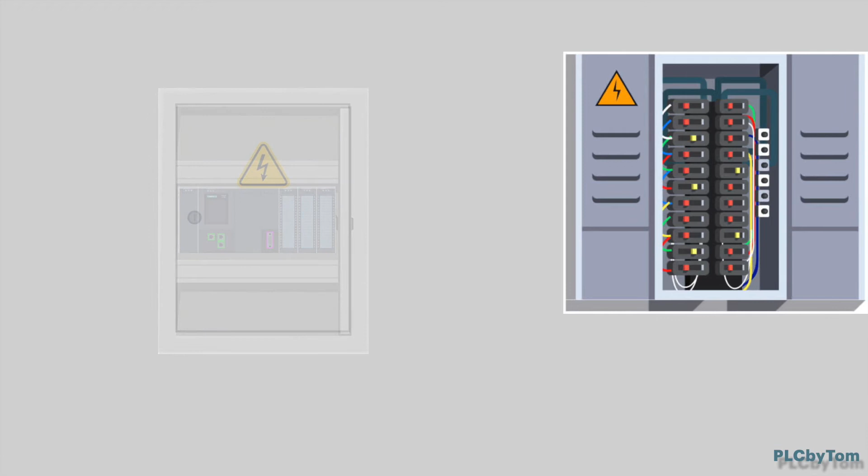It has a compact design and fits in the electrical cabinet. It provides flexibility in programming and high reliability, no program crashes or mechanical failure. Before PLCs were invented, machines were controlled by electromechanical relays with complex wiring. This approach is called hard-wired control. These systems were complex and extensive. They took up entire walls, which required massive wiring.

Relay logic is a hard-wired control system using instrumentation, switches, timers, relays, contactors, motors and actuators. Before PLCs were invented, machine and process automation was accomplished using relay logic. Automating a machine using relay logic requires massive wiring and a multitude of devices to perform even the simplest of tasks. Today, relay logic is done in the PLC, which provides flexibility in design, modification, maintaining and troubleshooting. Also, implementation of the control system is simplified.

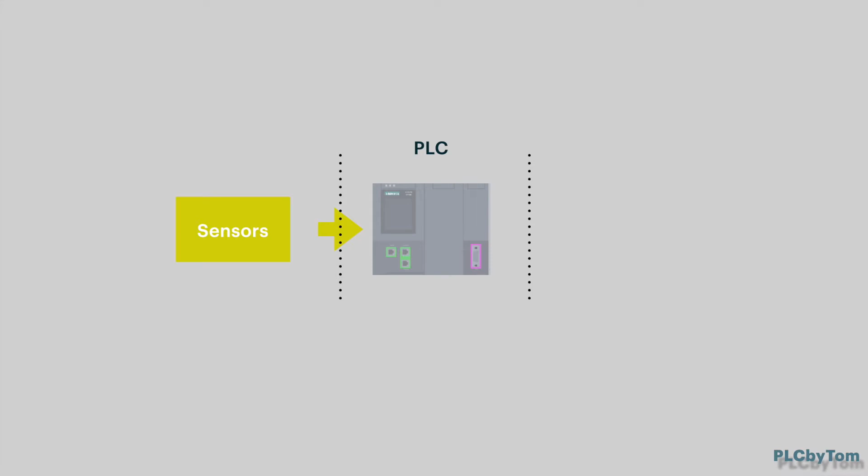Today most industrial automation relies on PLCs, like the oil industry, car industry, food and beverage industry, chemical industry, etc. PLC is able to read statuses and measured values from sensors via inputs, such as temperature, level measurement, or even push buttons or switches. And based on the user program which executes in the PLC, it is able to manipulate outputs in order to control machines or processes. Devices which are connected to the outputs such as valves, pumps, motors, heaters, etc., are called actuators.

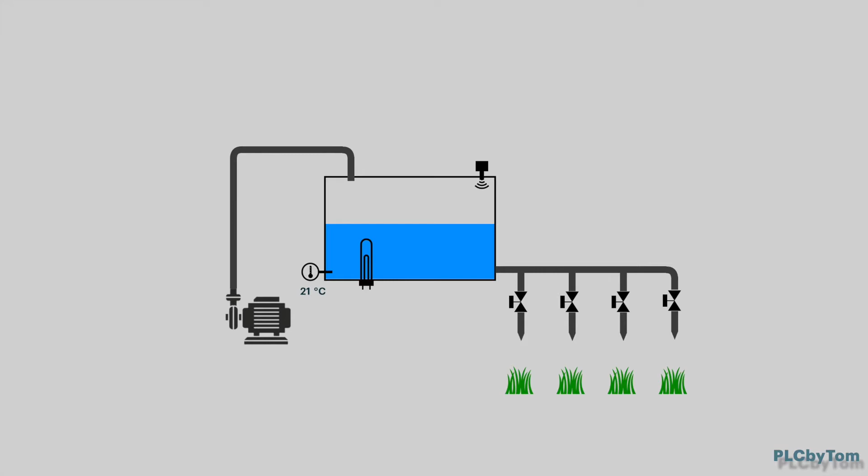As an example, let's analyze the following scenario. There is a water tank with temperature control. To maintain the temperature of the water, there are a temperature sensor and a heater. When the temperature of the water drops below 20 degrees Celsius, the heater will start until the water temperature reaches 22 degrees Celsius.

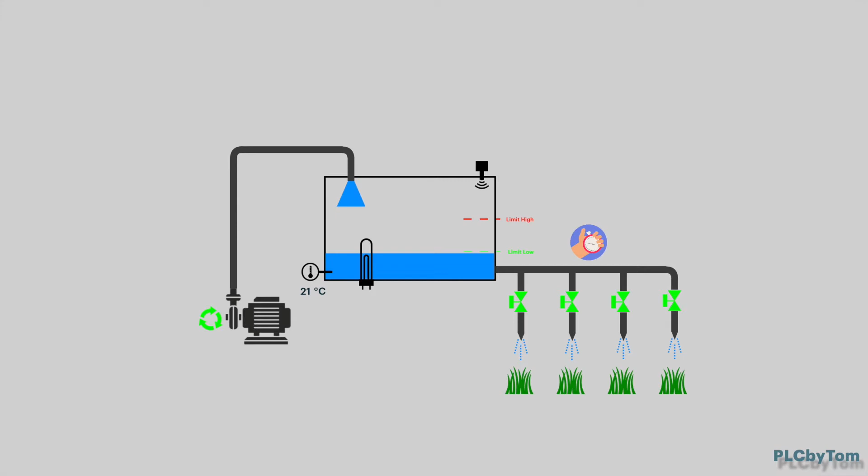The water tank can be refilled by a pump. To check the water level we have a level sensor. Below there are outlet valves to supply nozzles for watering of plants. The task is to start the outlet valves every day at 7 p.m. and let them run for 5 hours. This will discharge the water tank. When the water level drops below some level measured by the level sensor, the pump will start to refill the water tank until it reaches some level and then the pump will stop. All this control is done by the PLC.

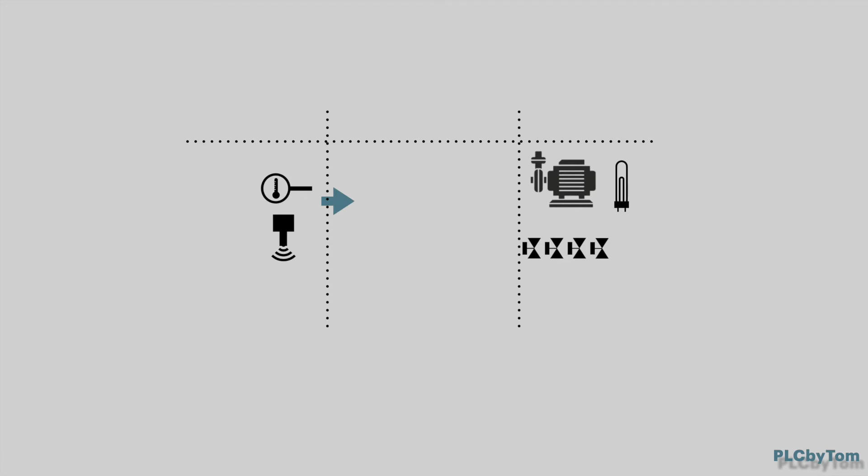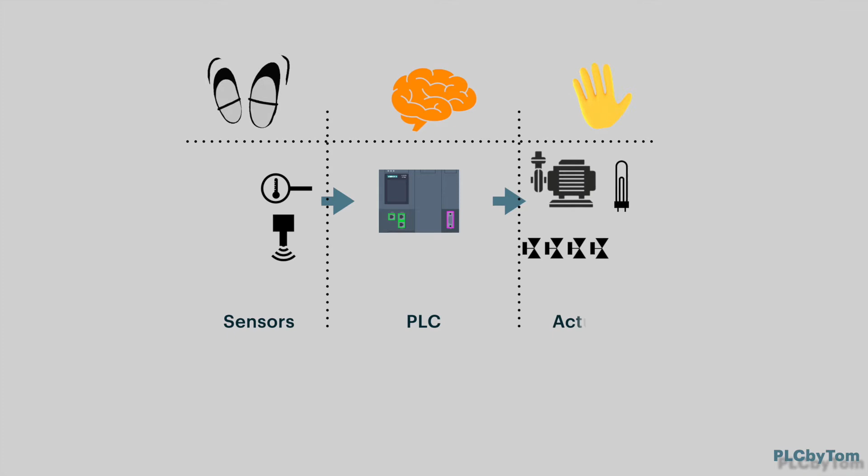The brain of industrial automation equipment is the industrial computer or PLC. To monitor statuses of a machine or process, the eyes of the automation system are sensors. To do some action, the hands of the automation system are actuators. The Central Processing Unit, CPU, is the brain of the PLC. The CPU stores and runs the user program.

The input-output system, often referred to as the I/O system, includes modules with I/O channels that connect to input devices such as switches and sensors and output devices such as valves, motors or pumps. Some PLCs come with integrated input and output terminals. The power supply module is an optional module that can be used. The power supply module provides the appropriate voltage level and current to supply the PLC. In practice, the power supply can be external instead of using a power supply module.

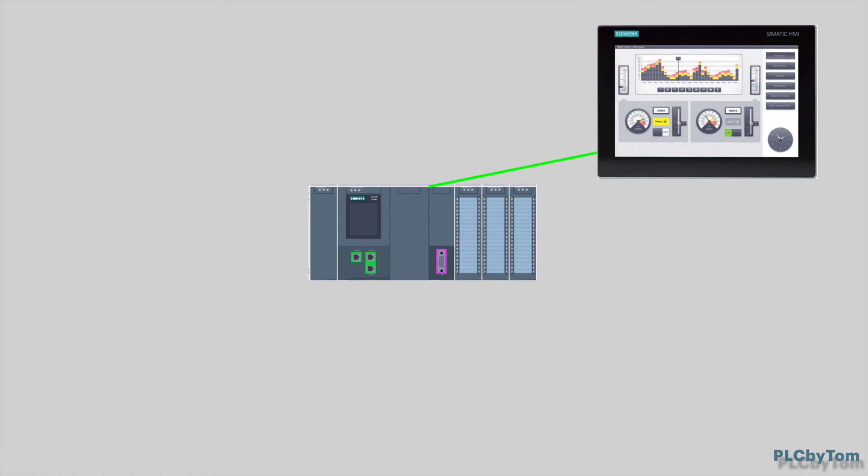Usually a PLC supports several communication protocols, which provides the ability to communicate with other devices. Often some Ethernet-based communication protocol is used. Human-machine interfaces or HMIs are often connected to the PLC to allow factory personnel to monitor and operate machines or processes. The HMI is permanently connected to the PLC and communication is established. All data presented at the HMI are cyclically refreshed. Sometimes hardware buttons can be replaced with graphically presented buttons on the HMI, which reduces wiring effort.

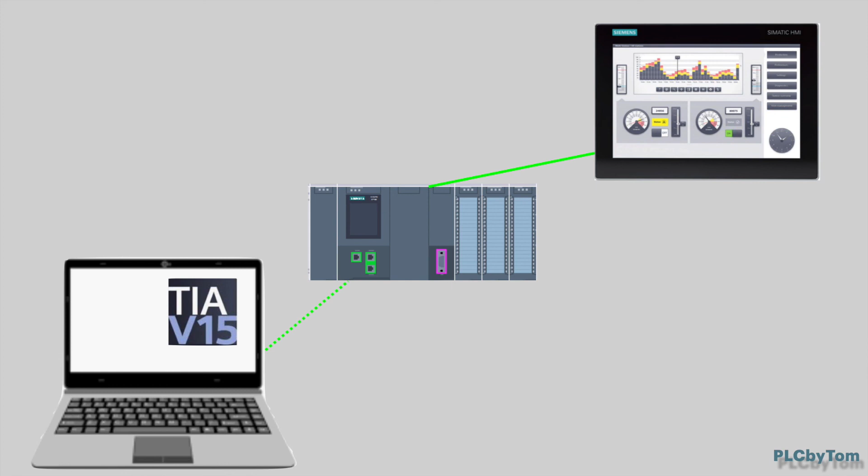Programming devices are used to load a user program to the CPU memory. Programming devices are usually a desktop PC or laptop with installed software that allows you to create and modify PLC programs. The programming devices are connected to the PLC only when needed.